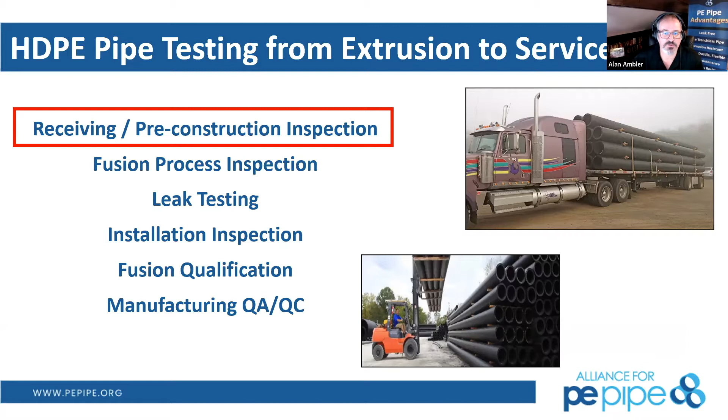If you need to pull together a 5,000 linear foot 48-inch job, that's going to be a long haul to be able to get you lots of pipe material. There's other ways to do it depending upon your project location. Sometimes they can float the pipe and then barge it directly to your project site. Lots of different ways to be able to make sure that this gets to you safely.

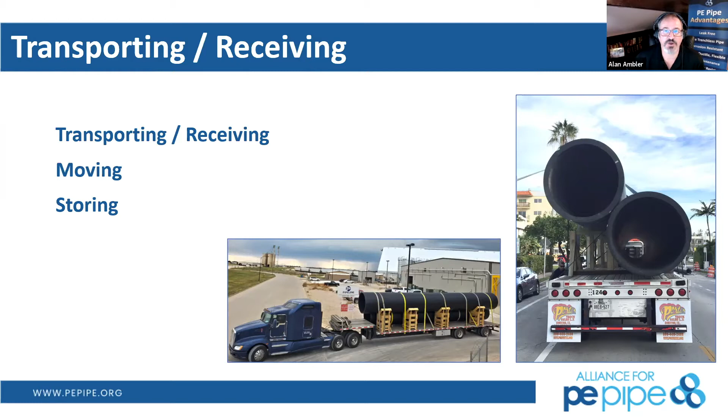We want to also make sure that it's transported or moved well while it is in the storage yard. So if you're using a forklift, we want to check that for jagged ends or burrs, and have the widest possible spread on that forklift, so you're holding the girth of that pipe material fairly well, so it's not lopping off from one side or the other.

Typically in pipe or any type of long installation process, where a completely fused system will allow you to take advantage of longer lengths, a laydown yard may be long and longitudinal as opposed to square and rectangular, where you would stack up pipe for a segmental installation.

So in instances where we have that long and longitudinal laydown area, there are productivity tools that make it so one worker can fuse up very long runs of pipe to be installed all at once. That's one of the true benefits of trenchless technology coupled with high density polyethylene, which allows us to install long runs all at once.

So these are just a couple of images showing you how to move this equipment and be safe with it. Again, we don't want to denigrate the pipe as we're moving it about the project site. I always like to point out when we're talking about transporting and receiving pipe that this is one of the key points where pipe can become a hazard. It can become a hazard to itself. It can be a hazard to personnel interacting with it and to the project.

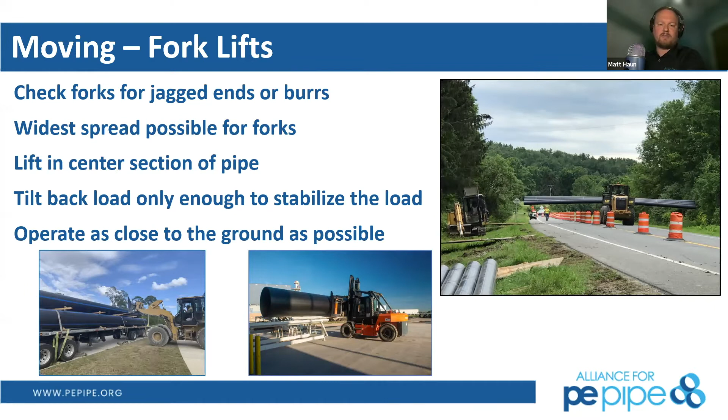And then the other bit is you can damage the project. You don't want delays because you get the wrong pipe delivered, or you've got to reround the pipe a whole bunch because it wasn't stored properly. Those are the things that I like to point out when we're talking about transporting and receiving. Great. And what are we looking for when we're inspecting for receiving and pre-construction inspection?

So what we're looking at most of the time when you receive a product is the paperwork that you receive and markings that may be on the product. And so what's the point of that? It's to make sure you received what was ordered and that it's a product that's suitable for the application. Usually when you receive a delivery, it's going to come with a certificate of quality or conformance.

So you'll see the customer name, the order number, the date of manufacture, the material type, any QA testing results if they're requested, and most importantly, the standards that that pipe was manufactured to. And so why is that important? Because when you look at the print line that would be actually on the product, you're going to want to make sure that those details line up.

Those could be the manufacturer, the size and DR of the pipe, the material that it's made of, that it's high density PE 4710 material, and any other standards that may be applicable, whether it's a sizing standard like F714, which is very common, or that it's manufactured to AWWA requirements for potable water applications.

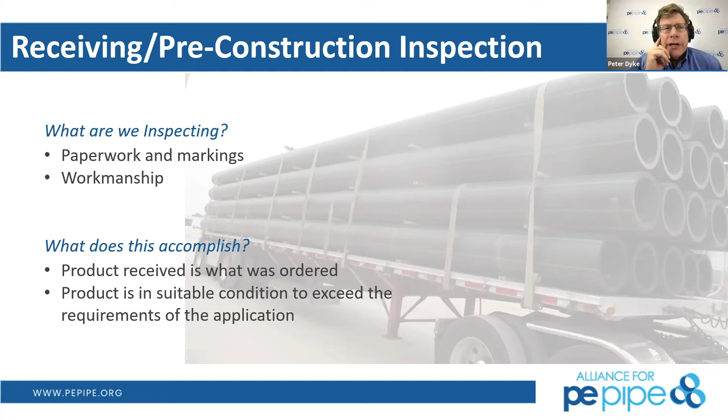So speaking, fellas, of damage during transit, I got a great question: is there a way to quantify the damage by chips or visual damage to the exterior of the pipe resulting from transportation? Now, quantifying it. We will talk in a few slides about the industry standard, which is 10% of the pipe wall would be allowable damage. It may be difficult in some cases to quantify the effect on the wall, but that has been the industry standard for going on 50 years.

Because the product is so workable in the field, if we have a long run that's already been fused up and something happens during transportation of the run along the job site, then the crew obviously is responsible for that, as opposed to transportation along trucking routes. But for that 10%, there are feeler gauges that will allow you to go into the gouge, so that'll give you an accurate record on it. But what I like to say is, when in doubt, cut it out.

The product is so durable and workable in the field that the process of fusing after you've cut a section out, depending on the pipe size, doesn't denigrate the actual product itself. The joint that we're replacing a cut section with is as strong, if not stronger, than the pipeline itself. Later on, we'll have good examples of scrapes and gouges so you can see the visual. I'm grateful you're already asking these questions, because it is covered and it is important for you to keep track of.

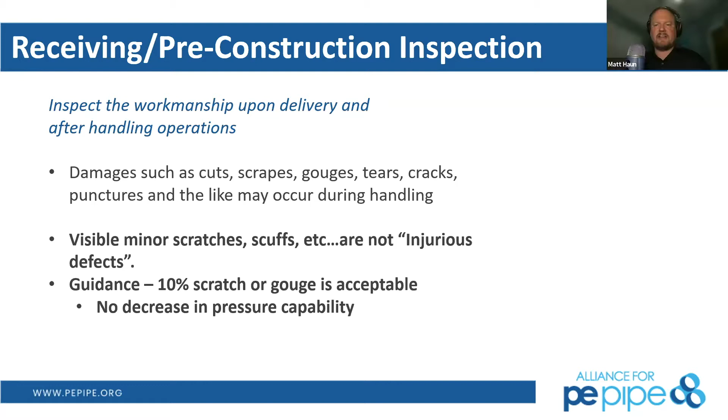One thing to keep in mind is that you need to inspect this workmanship after delivery, but also after any other handling operations. If you're taking it to a pipe yard and storing it in racks, you've inspected it. Then you're moving it to the site, to where it needs to be staged to fuse it and install it. Damage can happen during all of those periods. So it's important to check the workmanship and do these feeler gauge checks wherever you may be in question.

One other point about this inspection is that this guidance, this 10% scratch depth, is based on older PE pipe resins. Advances in resins have further improved the embedded safety factors that limit represented. So we're probably overly cautious with that 10%. It could probably be thicker than that, but this is the industry standard and we stick to it. So the pipe after this will still have a 100+ year lifespan.

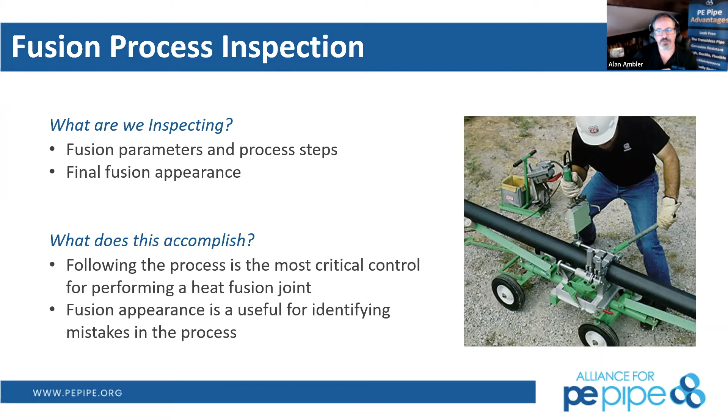Certifications are available in smaller diameter and larger diameter as well. So they're still teaching the essence of fusion, just on a larger scale, as we continue to go through that process. And here, Matt, I don't know if you want to talk to us about all the things that go into making a qualified fusion joint. It's not just the operator themselves.

The equipment has to be the proper equipment sized for the pipe that you're going to fuse, and it's going to be well maintained and qualified itself. Then on top of that, you've got a qualified procedure that you need to follow, because it's got to be a proven procedure for that product. So when we talk about fusion process inspection, we're really talking about that last element, quality control, and being able to control the fusion process is the absolute best way to guarantee a good fusion. We'll talk more about post-fusion inspections, but in the end, if you're not following the process, you're not going to have repeatable success with fusion.

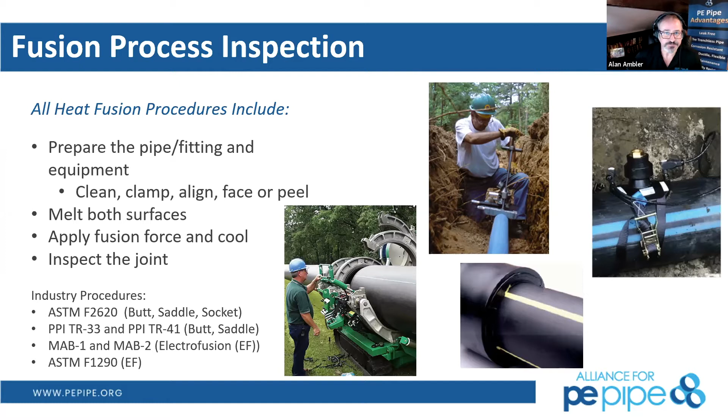So there are ASTM standards and procedures for you. You can see in some of these pictures what I mean by scaling up: as the equipment gets larger, the piece of equipment will actually do a lot of the alignment for you. When we get into smaller diameter service connections, as you see in the top right here, we've got a simple saddle around it, and we just properly prepare that location of the electrofusion saddle in order to adhere to proper fusion principles. So properly clamped pipe is what we're looking for.

Debris and contaminant free. We're looking for it to be dry, so covered from the rain or snow. If it is in the wrong temperatures for fusion, we want to make sure we make any type of temperature adjustment. If you're doing butt fusion in the middle of winter in Wyoming, you're probably going to be looking for worker comfort, as well as making sure all of the equipment is stored in the appropriate temperatures. So each job site has its own challenges that you will overcome by making sure that the pipe, the equipment, and everything is in good working condition and in a good environment.

Yes, Pete. Yeah, I would like to share with the audience that we're not going to use your name if you ask a question. That encourages more questions. Alan, I have a question and a comment. The first is, is there a list of certified personnel that is kept?

And I'll take that one. Yeah, we kind of have, and this is from an inspector in LA, we kind of have it. But Lee, one of the reasons I talked about the distributors that sell polyethylene across the United States is because we want you to use one of those distributors. They're buying into the program and they drink the Kool-Aid, and they have qualified staff that has been trained properly.

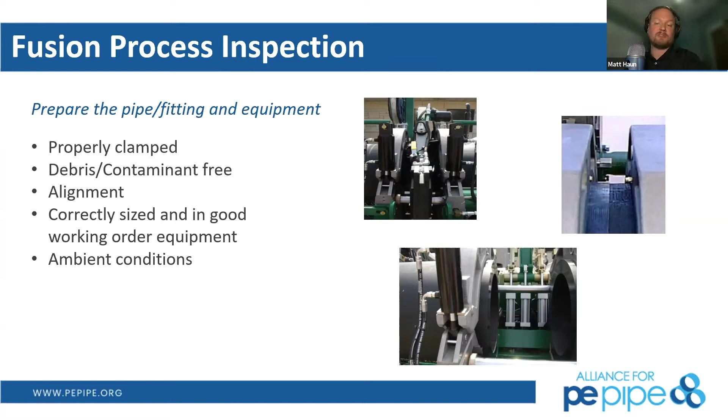And if it's a cold temperature where you've maybe put the actual fusion equipment in a heated booth or a controlled climate or protected from the rain or whatever, you are going to keep that same condition present. Matt, would you like to walk us through this slide for the actual fusion process inspection?

Yeah. So obviously, you've taken the pipe, you've clamped it in place, you've made sure it's clean, you've faced it, you've checked alignment. Now the point is we're going to go to melt the pipe. And so for butt fusion and conventional butt fusion, you're putting a heater plate in between the two pipe ends that you're going to join. You're pressing the unmelted pipe up against it, and you're applying a specific process controlled. And of course, your heater plate has reached the appropriate temperature, which you have to check with an external thermometer to guarantee that the process is at the right temperature.

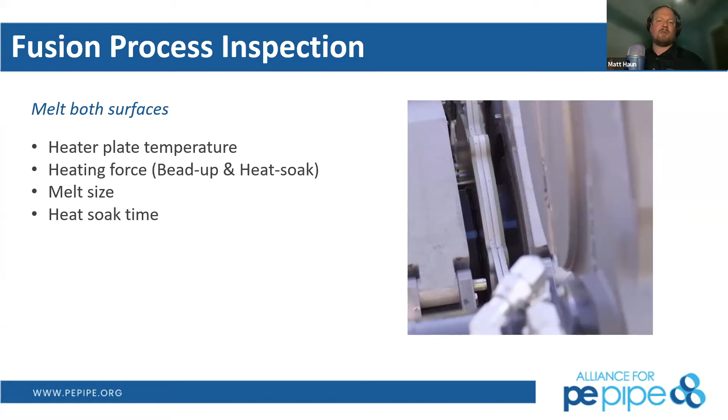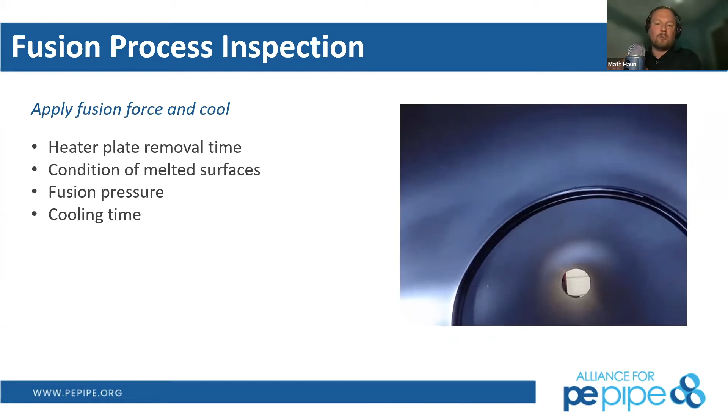You apply a bead up force and then reduce to what is known as a heat soak force. And that is the duration that you're trying to melt the pipe. That's pressure against the heating plate. Once you've achieved the appropriate melt, then you're going to pull the pipe ends off the heater plate, remove the heater plate, and then push them together. And so these key process inspection spots are things that you need to make sure are done for every single fusion. And so all of these steps can be recorded to create a record for your qualified process.

And so the next step, if everybody out there can see this bead that's created, this is on the inside of the pipe. It is exactly the same as the bead on the outside of the pipe. And then as an inspector, there's certain things that we're really looking for in the shape of the bead. Once this heat is created and applied to the pipe, we also have to properly cool it down before we do any type of rough handling with it. So it's important to allow it to have the appropriate cooling mechanism or time period in order to be a solid joint.

So here's some of the visual inspection that we're looking for from acceptable, unacceptable, and the like on the actual bead itself. What all can this be telling us, Matt? Yeah, so these are usually generated from your qualified procedure. And so the industry standard procedure is the ASTM F2620.

And so these images, what you're looking for on the bead is really that it's uniform around its circumference and there's no specific irregularity. Then also there's that V-groove that you want to make sure is above the original pipe wall dimension. And essentially you're making sure that you've applied the right pressure. So when we look at

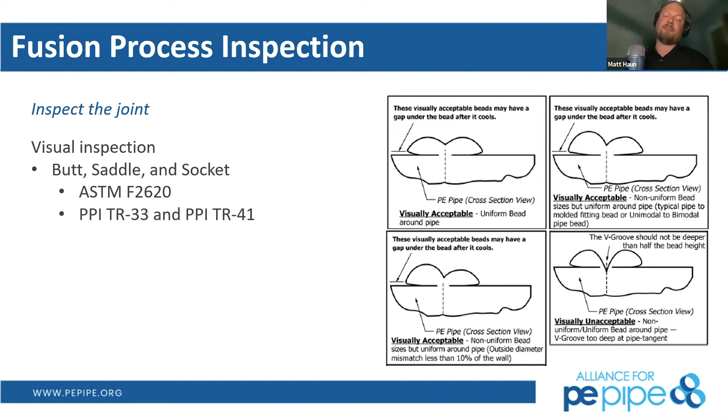post bead inspection, visual inspection, it's really only helpful in flagging those glaring mistakes that would have been made during the fusion process. So you can have a good fusion, you can have a poor fusion that looks good, but if you follow the process, you're going to have a good fusion that looks good. So that's why we also have data recording that's here. So it actually tracks all of that process.

The certified operator knows how to use this machine as well, and they attach it right to the fusion machine as we go through. It will track what the joint is, which joint by a number. It'll track the process that we outlaid for heat time and all of those other things that are necessary, and print you out a good viewpoint in that standpoint as well to track the actual joint. So yeah, and we'll talk more.

Good controllers also allow you to record the weather conditions, the ambient temperature, the wind speed, and the GPS location of your specific fusion as it's performed. That way you can follow back up after the fact.

Matt, I want to jump in real quick to address a comment from Resin Hutkins for the minimum bead requirements. So everything you guys mentioned, that is all standard procedure. And he referenced ASTM F2620. And at the end of the day, we always need to make sure that the fusion is actually following up and actually getting to that minimum bead requirement.

So although the heat time might tell you it's 1 minute and 11 seconds, it's also telling you need 3/16 of an inch on each side, so we're going to have to wait until we get that 3/16 of an inch. So if you're working in the Pacific Northwest in the winter, you might have to wait 1 minute 45 or 1 minute 50. So that's the standard we always want to make sure we're hitting.

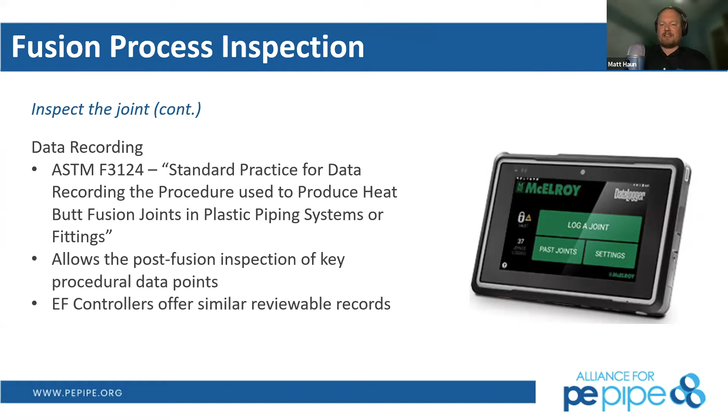So there are new technologies now that we are starting to incorporate within the high density polyethylene industry. If you heard me speak very much about high density polyethylene from a civil engineer outside of the industry viewpoint, I've seen a huge amount of technological development, ease of productivity tools and other things throughout the HDPE industry that makes life easier when we're installing this. And this is microwave HDPE fusion inspection.

It's a new technology that essentially has a sender and a receiver on opposite sides of the pipe, and then we actually look at that joint itself. You do have to debead the exterior of the pipe in order to be able to make sure that that tool can traverse circumferentially around the pipe.

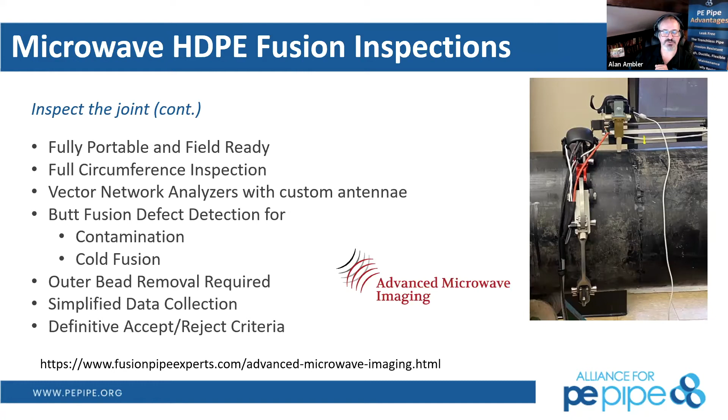And then it does look for fusion and how that molecule is actually blending together, of what we're really attempting to do through the data logger, and making sure that the molecules run across each other in the crystalline and the amorphous regions themselves. So here are just some. Again, this is pretty new, on the cutting edge of technology for that fusion inspection.

We were looking at things that could be good fusion, hydraulic fluid contaminated fusion. So if we get to a scenario in which some type of a contaminant was there, it's going to impact the fusion process and parameters and really send up a red flag for us that it wasn't done correctly.

Or if potentially water had gotten onto the actual face of the pipeline during fusion, then that water could release steam as it goes through and gets heated, and put a pocket of absence of material in there that we're looking at. In cold fusion, we're over pressurizing the pipe and forcing it together to not allow the proper time to be able to fuse that pipe material.

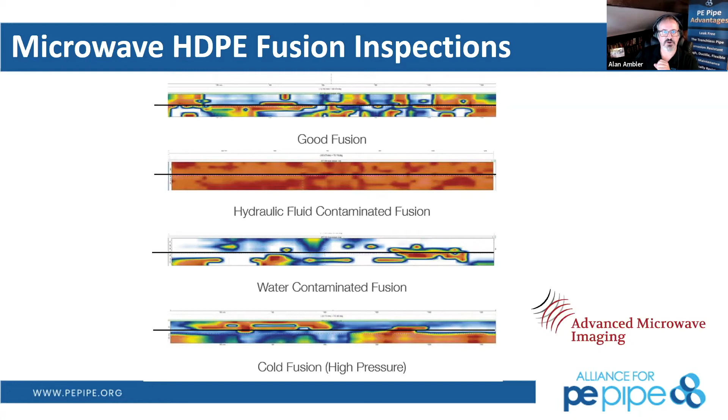So this is just a new tool that's coming through, and in the next several years you'll be hearing us talk more about it as it gains more popularity.

So we'll go right straight to leak testing now. What are we inspecting? We're looking for faults in the pipeline in general, regardless of pipe material, as we go to put in its installation or its connections. Of course, high density polyethylene is a leak-free material. So if fused from one end to the other, we're not going to have any leaks.

But oftentimes when you are putting in new systems, we have to connect to valves or other pipe materials, and a completely monolithic system for a municipal water wastewater system would be almost impossible to achieve in some places where we have a lot of existing pipe to go through. So one of the key things to understand and differentiate between legacy pipe and high density polyethylene is that there are allowable leakage rates within those legacy pipe systems. And part of the way that these things are constructed is what leads to that.

So what you're looking at here happens to be an open cut installation project of high density polyethylene. And as the crew moves forward and puts this pipe into place, the local MOT conditions or road resurfacing conditions may very well kick in where you'd have to bury this pipeline before we could turn it back on, in which case that's where the allowable leakage rate comes into play for legacy pipe materials. It would be extremely costly for the contractor to dig up the entire run for a little bit of leaking to be able to properly access the pipe that was installed. And that's one of the reasons why we have an allowable leakage rate as such.

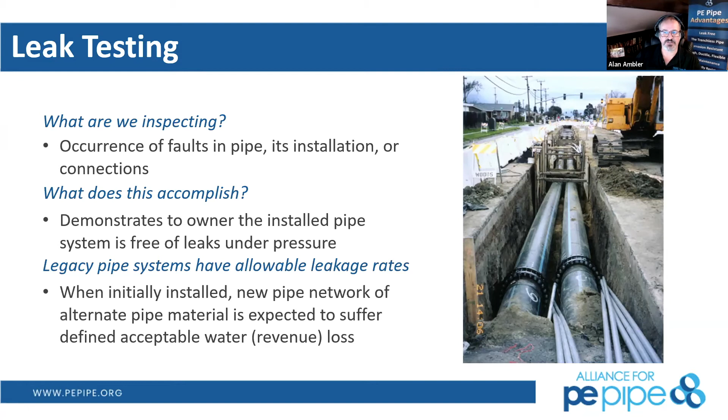How is this different from a regulatory perspective? Those of us that have talked about it until we were blue in the face know that the commodity value is what really differentiates the municipal water and wastewater sector from a municipal gas sector or some other type of commodity that we're talking about. So when gas mains leak, things blow up and kill people. So the consequence of failure is severe in that situation, in which they want to make sure that we know the condition of the pipe, we know when it's going to fail, and we proactively replace it. That is pushed from a regulatory perspective.

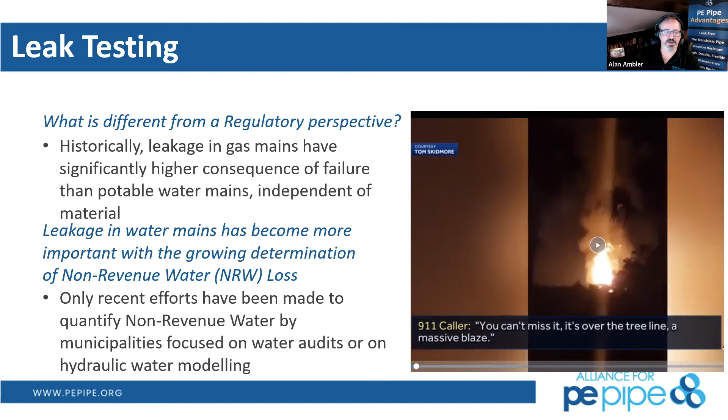So here's the ASTM... Go ahead, Dan. Yes, sir. Sorry, Alan. I think I might have jumped the gun on you a little bit early, as I see leak testing just got pulled up. And I'm not sure if you or Matt want to answer this. I know you've been on a ton of job sites in person, but they are wondering if the flex in HDPE is something that you can observe during leak testing. I'm guessing they're getting at the swelling of the pipe. I'm not too sure if you actually can see it or not.

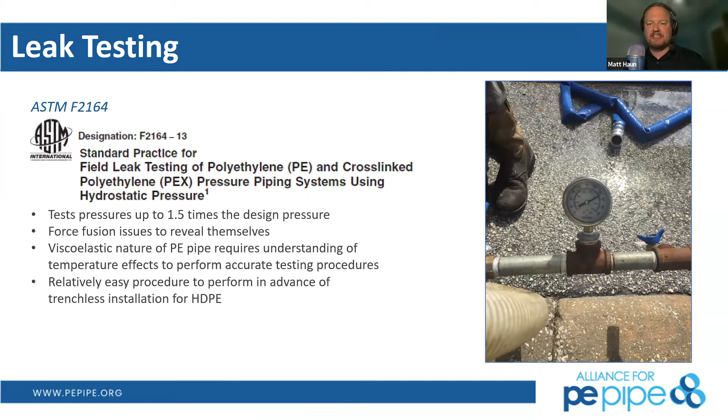Yeah, and Alan, that's due to the Poisson effect. Basically, as you expand the pipe during pressurization, the pipe length is going to want to contract. And so you're going to notice that you may have a pullout force that you need to account for when you transition to other piping materials. When you're going from polyethylene to polyethylene in a heat fused application, those joints are monolithic and self-restraining. So they're not going to pull out from each other.

So the overall test parameters themselves, we seal off that end of the pipe, still allow us to be able to access the inside of the pipe through an opening that you're seeing here on this fitted end. As we go through, we're going to get to that max internal pressure that we're looking for, let it sit to be able to see if we needed to add any makeup water that way, and it takes care of the expansion of the pipe material as we are charging that interior of the pipe. You reduce that pressure by 10 psi and hold for 1 hour, and then we look for any additional makeup water that goes through there.

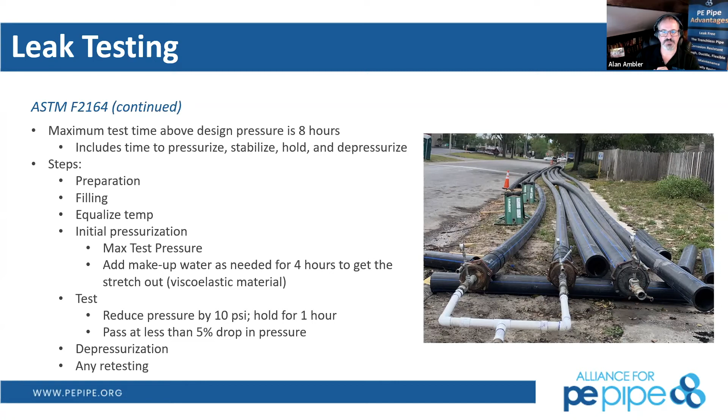For the long runs above ground, this is a pretty robust process, as we're looking for any leaks whatsoever within the pipe, and they would certainly show themselves through this process. Again, it is very different from bell and spigot pipe when we're limited to certain sections to be installed because of MOT constraints and other things. Again, I said trenchless installations are different than traditional open cut.

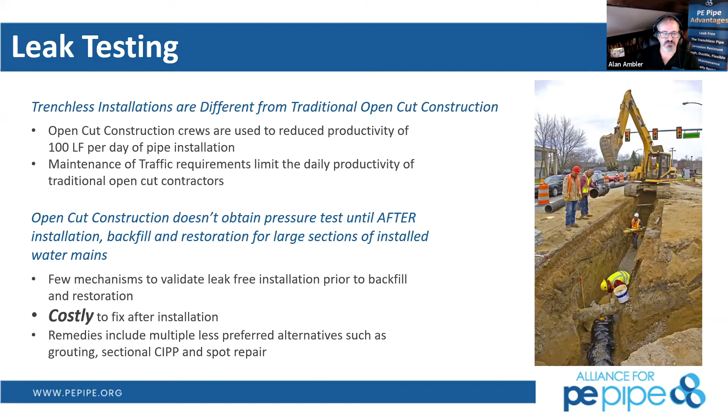Here's a prime example of a segmental pipe being put in. By the time that they bury this pipe up again and realize that they can't maintain a pressure test on it, then it's going to be pretty costly to come back in and expose that pipe and do that fix. So the benefit of having high density polyethylene above ground to be pulled into place that we already know is pressure tested, and not pressure testing it after backfill and compaction, is pretty easy to observe.

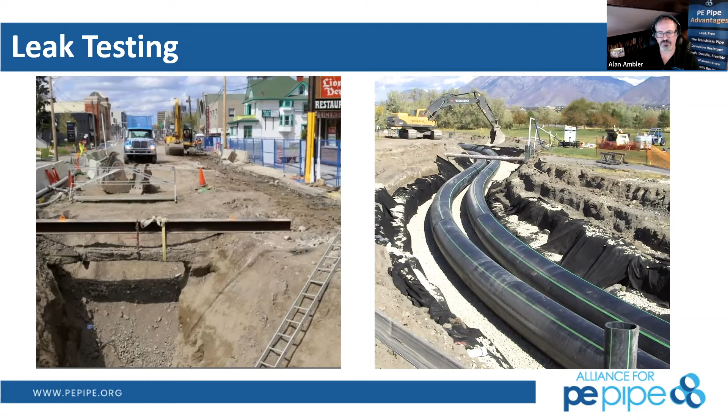So here's again some differences in installing the pipeline as we move forward. Here we can see that these pipes may or may not be leaking as we install them, and we would have done the pressure test in advance of pulling these long runs into place as well. There's a process called pre-chlorination. So at the same time that you're doing that pressure testing, we're going to disinfect the interior of that pipeline. So they'll put bleach through that pipeline to be able to make sure that any contaminant that may have gotten into it is knocked out and disinfected.

You flush out that disinfected water and replace it with potable water from the water system, and then take 2 days of subsequent bacteriological samples that will prove that the interior of that pipeline is safe and disinfected. And then by the day of the pull for a horizontal directional drill or pipe bursting, you'll seal off the end, connect it to a swivel or other sealed end, and then be able to pull that into place. It's a rather robust system in which we'll be able to turn that pipe on almost immediately in the states that have approved the process.

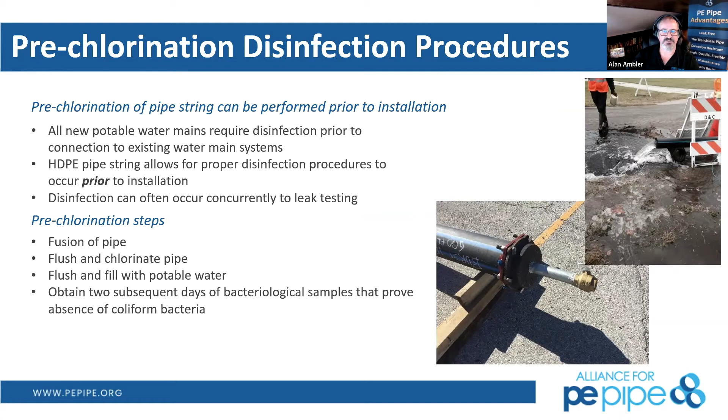In traditional open cut construction, what we're really looking for is good backfill conditions for unique burial conditions, such as excessive point loading or very deep installations, or very poor native soil conditions. So typically that 2 to 3 feet to a 25-foot depth range can be installed with no issues on high density polyethylene pipe in general. From DR11 to DR21, we're looking at specific scenarios if you want to look at pipe soil interface type.

Yes, Dan. Okay, yeah, you went on a little bit longer. I was going to ask you when point loading is a concern, because I know a few engineers were conservative and addressed that with you, and I know it's come up a few times.

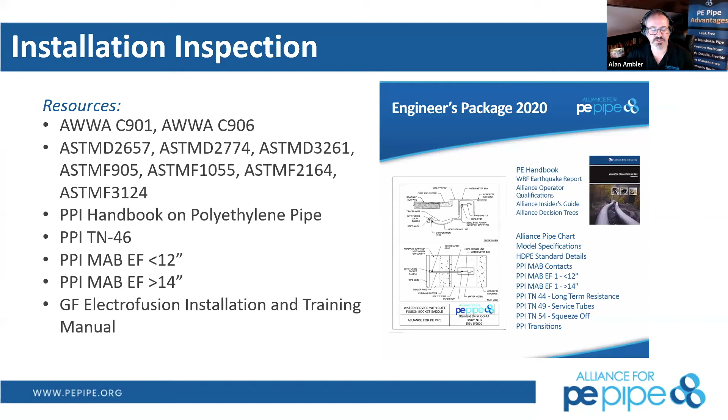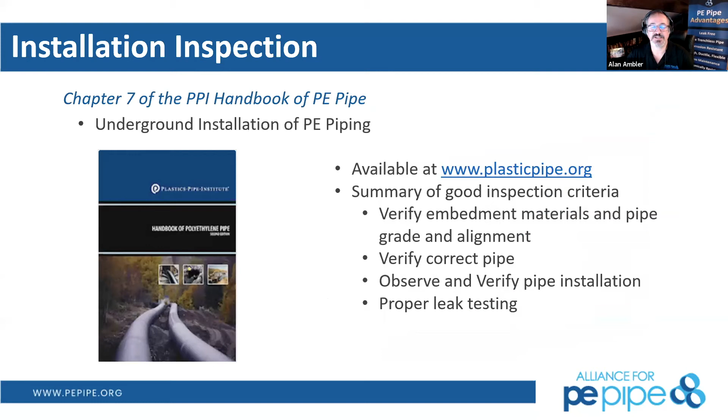Awesome. Thank you. These are resources available to you that are listed. We've mentioned C901, C906 before, M55; AWWA just reissued a new version of their handbook that is easy for you to use. Most of those are included in the engineers package. We're not allowed to include ASTM or AWWA standards themselves, but we do list those out so that way you can get them if you'd like to. Chapter 7 of the polyethylene handbook on PE pipe talks about all things underground installation, and it's a very good resource for you that's here in the engineers package.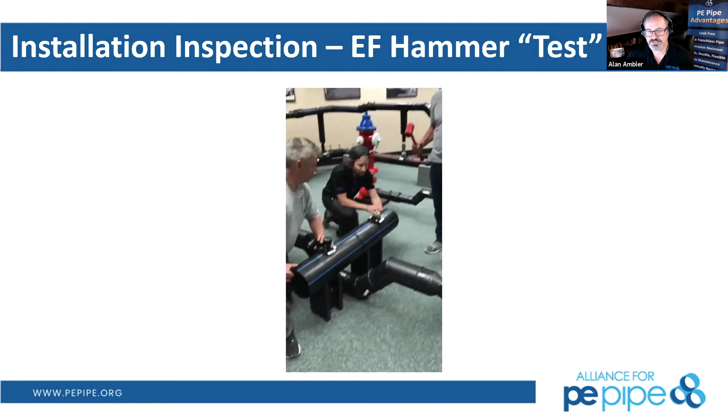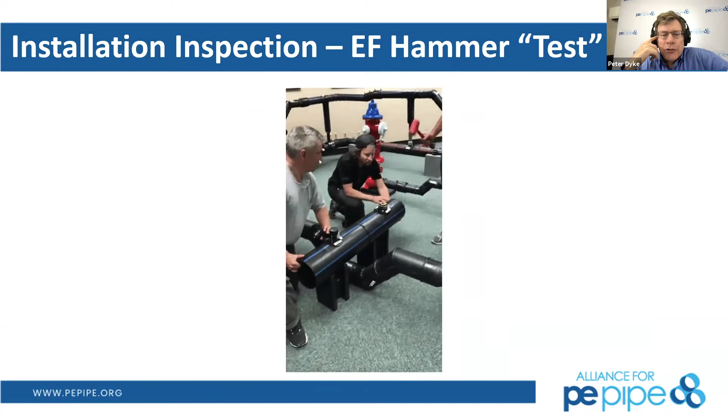Here we have an installation EF hammer test. Pete, do you want to come on and tell us about this hammer test that you and Richard and Drew were able to conduct here? Well, this is the most scientific of all the tests that we'll have in the show today, Alan. To be sure, this is our good friend Steve McDonald. He had an owner who didn't really trust electrofusion, but you know what, Alan? Electrofusion is just as good as butt fusion. In both cases, you got to follow the rules, and that's what we did when we put this pipe display together. So good work, Steve McDonald.

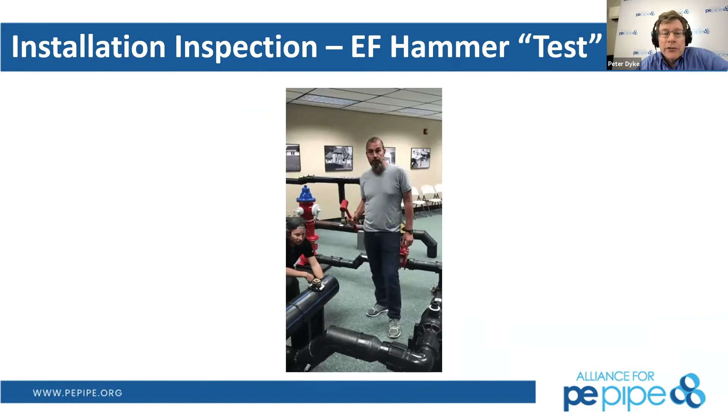Thank you, Steve. There's other reassurance testing that we're going to get into too. The bend back test, guided side bend test, and other things that you can accomplish on site. These aren't necessary for every fitting or every installation. Obviously, these are destructive tests that you would perform. So if you're curious about a new fitting from a new fitting manufacturer, this would be a good opportunity to validate that the fitting does pass the testing that you're looking for.

Maybe you'd want to do 1 or 2 of these tests at every start of the project to make sure that the fusion operators are following the process and the steps correctly. If you're unfamiliar with a contractor, go through some of these other robust tests.

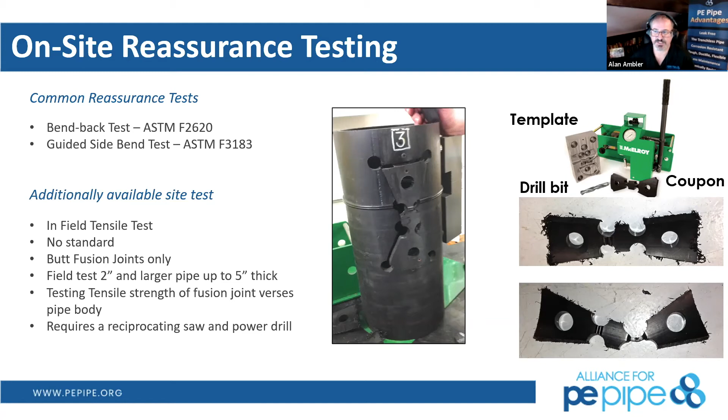From that, I'm going to talk about the F1055 standard, which is a joint crush test coupling preparation. So we will take and cut an actual coupler longitudinally across that coupler. This is something that you can test in the back of your pickup truck if you got a vise mounted on the back of it. So we'll have the electrofusion operator make sure that they perform the electrofusion properly in the field. And then this will actually go through the process of forcibly smashing down that pipeline to see if the coupling crush has passed that electrofusion process or failed that electrofusion process.

The Alliance for PE Pipe has a very good video of this that will be coming out hopefully in Q4 in some of our social media posts that you might see. But as you can see here, the coupler on the left did pass the electrofusion process, and the one on the right was not prepared properly. That surface preparation is key for electrofusion. This is something that a construction inspector out in the field can do in a vise in the back of a truck.

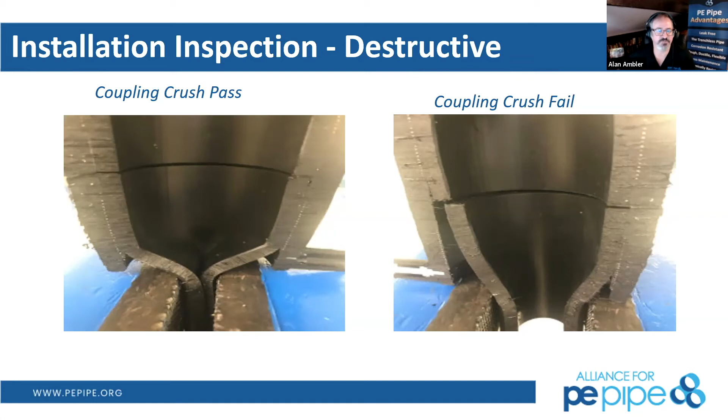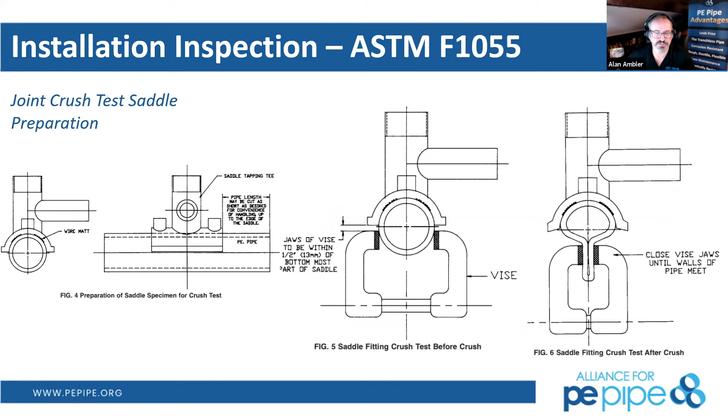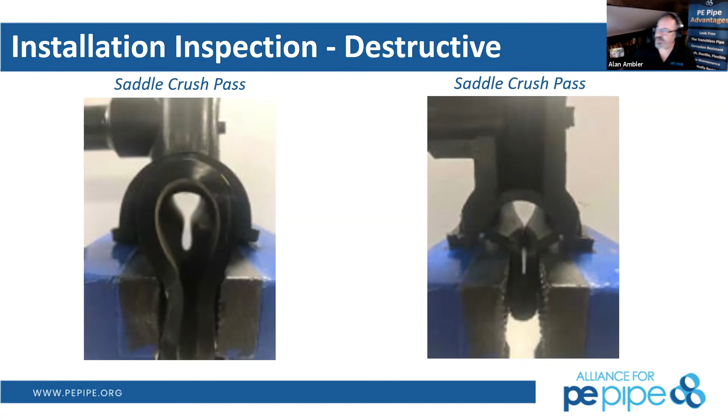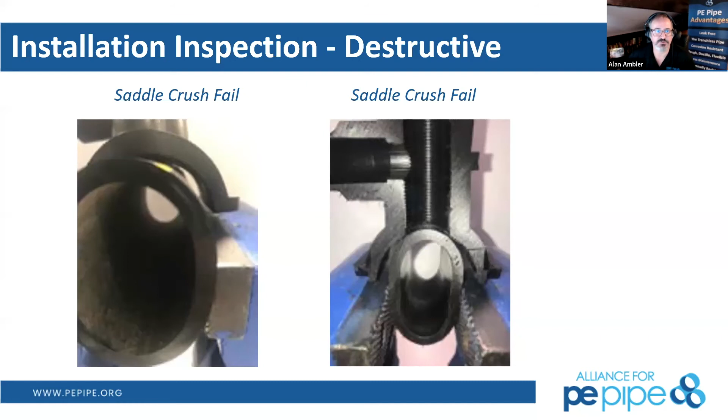You can see here that this was improperly prepared, and the bond did not happen correctly between the saddle and the mainline pipe. And as we crush that pipe in a vise, that failure will show up right away. Again, with butt fusion and electrofusion, if the process is followed appropriately, that joint should be stronger than the pipe itself and should not be pulling out of this saddle as we show here. So this is an easy test to do on a relatively inexpensive fitting with a new contractor to make them show you that they can do it appropriately.

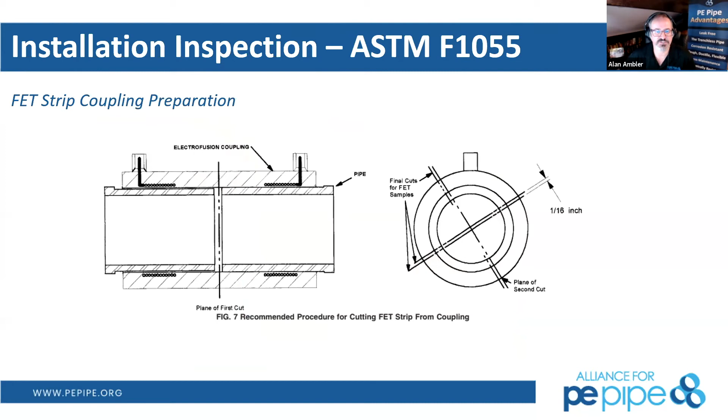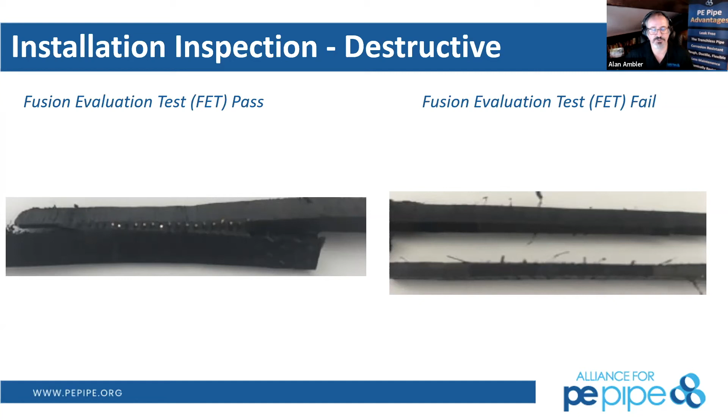So here's a FET strip coupling preparation. This one is slightly more challenging to get to as far as looking at what we are trying to analyze. We're going to bend that strip about the fusion line and then get to our end results. Here we show a proper pass of this test and then a FET fail of this test in this scenario. So there's multiple different ways, but these are all destructive. And again, some of these fittings may be appropriate to test in a destructive manner if you're trying to get to know a new fittings manufacturer or you've got a new contractor on the site.

And Matt, do you want to take over and talk a little bit about the data logger here? Sure, and what it's showing us. So we talked earlier about all the different steps that you could record in real time. What that allows you to do is have proof that you've followed it successfully, and you're basically trying to guarantee it won't leak. It's definitely important for more sensitive or challenging installations, and I believe the next slide will go through it a little bit, where you won't be able to recover and redo the work that you've done. So you're going to want that extra reassurance on the front end.

Recording all of the fusion process steps will allow you to prove that without having to go back to redo your work. You get to see the bead-up pressure, that first initial spike. You've got heat force and heat soak time, that long period under the green line. This is a pressure versus time graph. Then you've got a key amount of time to remove the heater plate and apply your fusion pressure, and that's the red zone, indicating you're applying the appropriate fusion pressure. Then you're holding it for your cooling time, the blue area, for the duration needed. That allows an owner to either hire somebody to analyze all of their fusions or do spot checks. They can pull up every single fusion on the entire job and review the data.

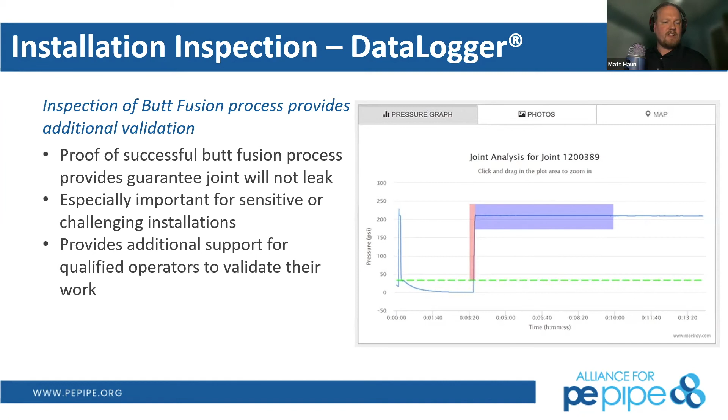So when Matt talked about sensitive locations, we mean that high value asset where consequence of failure is severe or failure will go unnoticed for a significant amount of time. On the left here is a 54-inch, 4,100-foot low pressure force main in Miami Beach where we want every single one of those joints to be absolutely perfect. And your fusion tech is going to want that too and have the proof on it, because after this asset is installed, if it fails, it could take some time to discover where that failure is and then to replace it.

The same thing with the picture on the right, which is a subaqueous or bottom of the river type of installation, where if this pipeline failed, we could be leaking some of the useful water that we're trying to collect, as that is a source water pipeline.

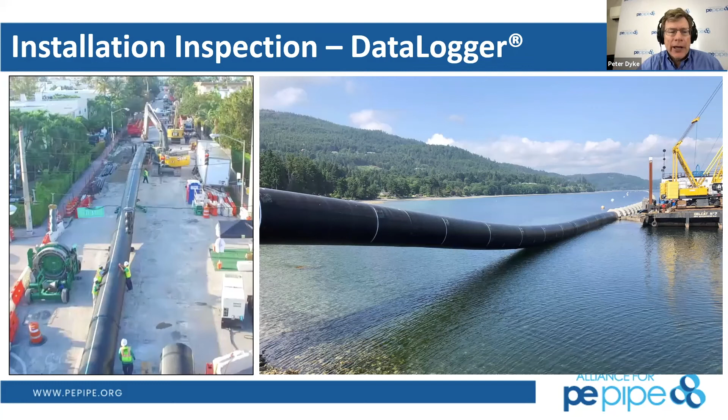Thanks, Pete. So some of the key observations that we're looking at are disinfection procedures, pipe scraping or gouging, as we've talked about significantly earlier, proper alignment of that inspection or installation equipment, handling of the pipe beforehand. If it's offsite at a laydown yard and we want to pull it into place, either for a horizontal directional drill or pipe bursting application, that construction observer should walk the full length of that pipeline to look for gouges or scrapes that are in excess of that 10% limit that we're talking about.

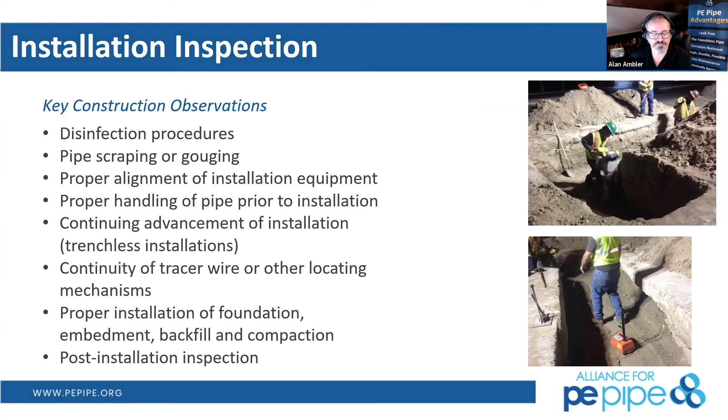Want to make sure that that tracer wire is continuous. So for a sensitive pull through high friction areas, we may very well want to do a beefed up tracer wire or 3 to make sure that we have that asset to be locatable in the future, and all proper compaction backfill are necessary. We talked about when in doubt, cut it out.

This picture that you see here occurred at 3:30 a.m. on a pipe bursting project that was on a DOT road where we had very minimal time for road closures. That was from 7 p.m. to 5 a.m. And I had noticed a very large gouge in the pipe, the second pipe run that they were pulling into place on the second night of the actual pipe bursting process.

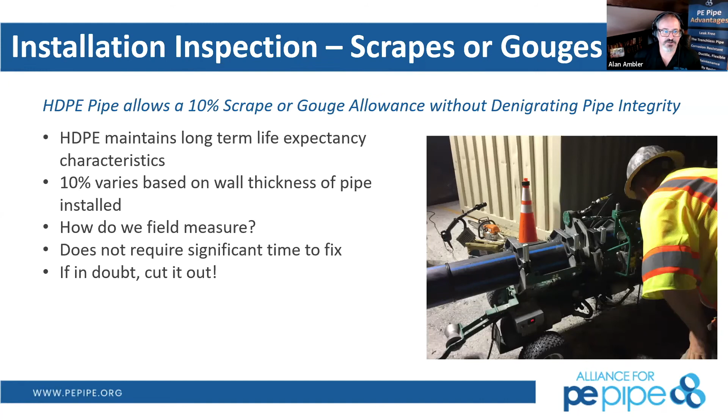And all it took for the superintendent on the job site, after I had determined we were cutting that section out, was to cut out a 5-foot section that contained the gouge, and then to be able to butt fuse that pipe through. And they lost about 25 minutes. So when in doubt, cut it out is exactly what I go by. And here's some process of how that happened.

Oftentimes we use truck tires or other things that are soft to directionalize a pipe moving process from the laydown yard to the installation location. Here you see a piece of plywood that's up against a dumpster. The second night when they had the gouge, someone forgot to put the plywood in, and so the edge of the dumpster then gouged the pipe.

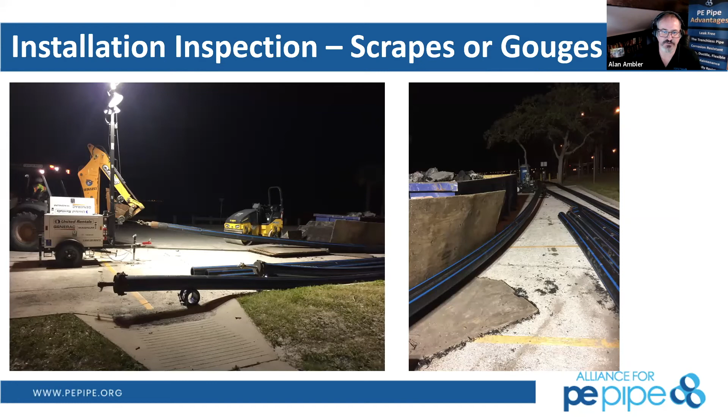These are normal scrapes that are okay. This is on the right. You see just a bead that's scraped through, and they pull that along the ground for pretty typical processes. And this does not exceed the 10%. If you don't want that, there are rollers and other things that they can pull along.

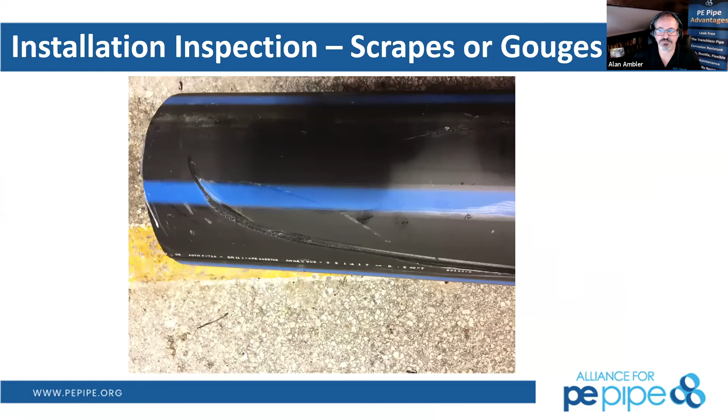This is the gouge section in particular that I had wanted to have cut out. So I did have doubts about this and did believe that it exceeded the 8-inch DR11 wall thickness beyond that 10%. And we simply cut it out as we go through. So we want to look at locating mechanisms. Of course, high-density polyethylene is a thermoplastic material that is not electrically conductive, not like a metallic pipe. So we want to often put that tracer wire, float balls on that.

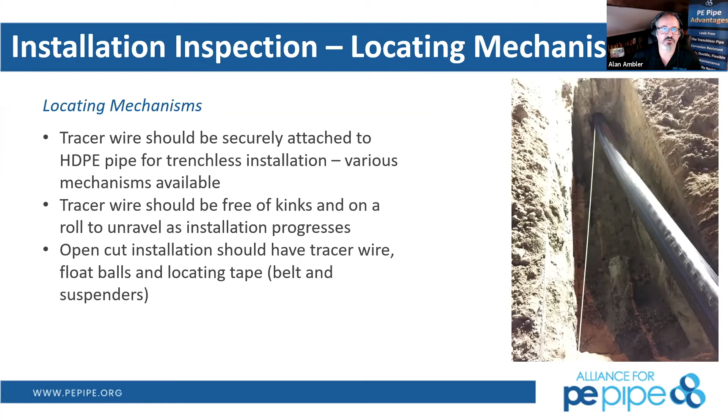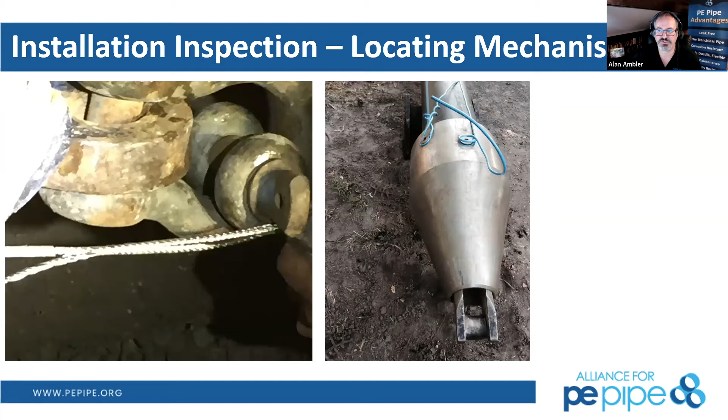Some things that we're looking at post installation: CCTV to validate line and grade for gravity sewer application or storm sewer application. Smoke testing, we can smoke test polyethylene pipe for gravity sewers themselves, or low pressure gravity sewer testing through that as well. And then preparation of those as-built documents in whatever manner that you want to, as an engineer, collect that information. So there's lots of different mechanisms to be able to provide those as-builts.

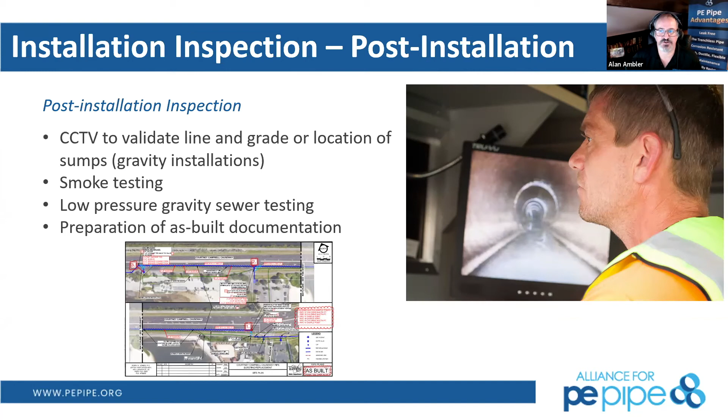If you have GIS records that need to be beefed up, it is quite possible to use a Trimble or other GPS locating mechanism to actually get on top of any of the valves or other important appurtenances that you want to capture their location themselves. So we're going to talk about fusion qualification.

So we talked about the process inspection before and did talk a fair amount about actual qualification through that process discussion, and then manufacturing QA/QC. Pete, you got something for us?

Yeah, something quick, Alan. I don't want to push you back any further, but I got a question about once tracer wire breaks, how do I reconnect it? And does it really break very often? That's a great question. Oftentimes it'll depend on the friction through the soils, and yes, it can break. That's why in HDD, where we have a deep crossing, we're going to put 2 or 3 of the tracer wires through there, and the same thing with pipe bursting when there's high friction forces.

The way to reconnect it then, depending upon where that tracer wire actually broke, you would perform an excavation, get down and splice it together with a new tracer wire and connect it to the valve, and finally all the way up to a meter as we go through, so there's continuity through that line itself.

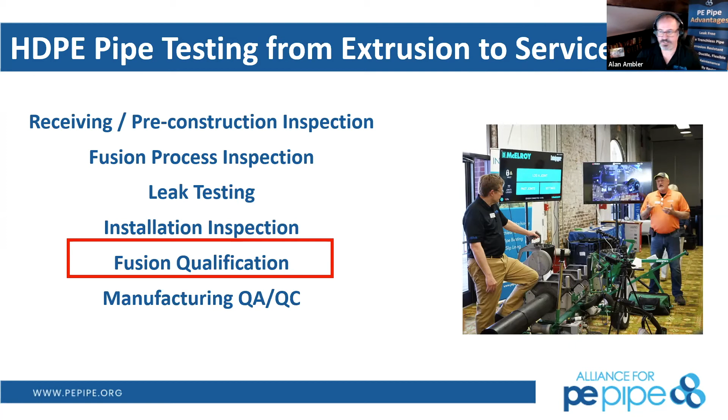It is not uncommon for locators to be able to try to get signal in different places. In one of the projects that I've been to, the tracer wire popped in the last 5 feet and yet they were still able to trace that line all the way up to 5 feet from where they started the next set of tracer wire on the valve. So they do have different mechanisms in order to be able to try to find this pipeline afterwards if that tracer wire does break on you. So great question. Okay, fusion qualification, Matt, you want to take some of this?

Certainly. So fusion qualification is represented in both our material and product qualifications, but it's also utilized in pre-construction on-site considerations. So, what are we inspecting? Well, that the procedure is qualified and that the operator is trained and proficient with the equipment. So what is that going to accomplish? It's going to verify that the operator has the appropriate amount of training with the appropriate equipment to do the task.

So next slide. So we look back at the same Venn diagram that we had before, regarding the things that must overlap. And obviously qualification is a matter of 3 of those 4 elements. You've got a qualified procedure, qualified operator, and qualified equipment. Next slide. So most of your manufacturers are going to manufacture their products to industry recognized heat fusion procedures. So the most common one is ASTM F2620. It's a generic fusion procedure that came from PPI's TR33 and 41 testing.

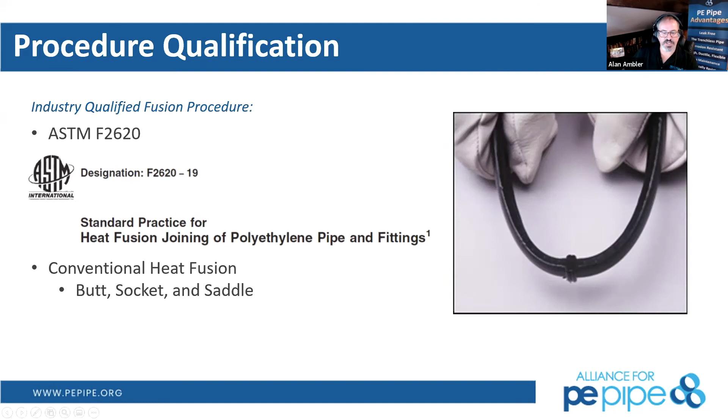And so if you're using a qualified procedure, in order to qualify that procedure, you have to do a barrage of physical tests. So stealing again from the gas distribution industry, the Code of Federal Regulations has a very specific list of required physical testing that you have to perform as a manufacturer of the product or the utility utilizing those products to make sure that the polyethylene that you're installing and the fusion procedure that you're using are qualified. Next slide.

So we're getting into the parts of the presentation now that really build before we even bring the material out into the field. So there are lots of things that govern safe working with this, safe manufacturing, robust manufacturing to where we say it's going to be a 100-year lifespan. And then these are all the steps and processes to make sure that when you do put that pipe into the ground, these are the best ways to achieve that maximum lifespan that we're preaching and looking for.

And a number of the tests that you can do for actual operator qualification can be done on site to reassure. We talked about on-site reassurance testing before. Many of these same techniques can be used and are used on job sites to make sure that, hey, this crew that may have gotten their qualification a year ago is still up to snuff and they're still able to perform it, and more specifically with the specific equipment at the specific job site.

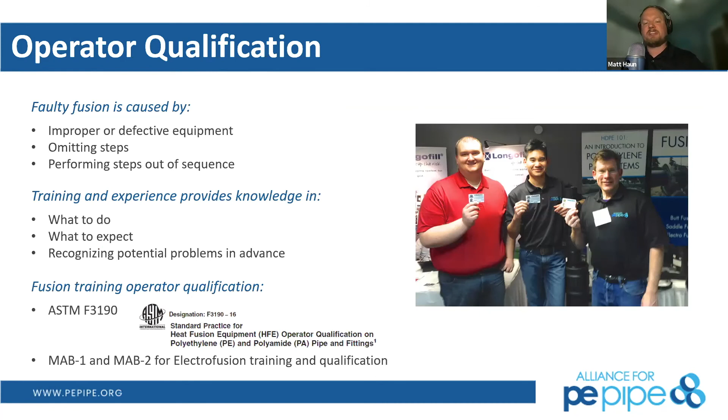So when you know that you've got a qualified procedure, the next logical step is to look into what causes a faulty fusion. And so there's an ASTM standard that dictates the training that an operator has to have in order to be qualified to perform fusions. So F3190 will require physical tests of samples that they make in order to receive your qualification card. So the most common method is actually found in F2620. It's the bend back test. Basically for 1 inch and thinner pipe walls, you take a longitudinal test strap from a pipe fusion and then bend it back.

So the inside of the pipe is on the outside of the bend and the outside of the pipe is on the interior of the bend. And so basically you're looking for that bond continuity and to justify the strength. So you can't see any cracking or crazing or any sign of failure. And of course, these ends are bent all the way back to touch themselves. So it's a very rigorous test on that actual fusion.

So Matt, with a wall thickness, let's say it's a 24-inch, 1 inch wall thickness here, you're probably not going to bend that back by hand, right? The Incredible Hulk probably could if we were watching the Avengers, but not gonna be able to bend that one back by hand. That's pretty stout, robust. Right. Yeah. 1 inch is really the limit of this test. But yeah, you can put it in a vise and then just bend it over on the vise.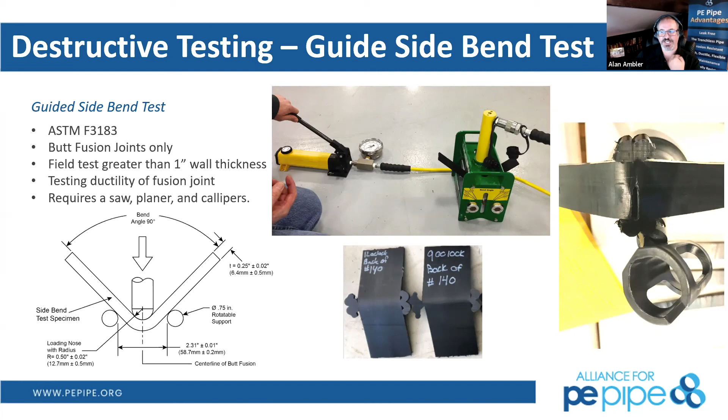Just because the Alliance for PE Pipe has a big Penske truck and hauls all this stuff around doesn't mean that everybody out there can't have their own equipment to make that happen too. Definitely. So we'll talk more about manufacturing QA QC through here. And I'm going to defer to Matt because this is much more his realm than mine, but I still will frame the important components of it as it applies to field inspection. We only have about 4 minutes left of the regular time, Matt. So high step it through these.

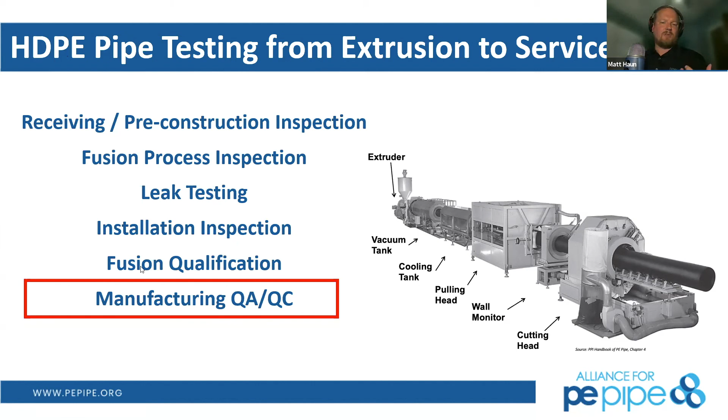Yeah. So making solid wall DR pipe is a multi-step process. You got raw pellets that extrude through a die into a vacuum tank to set an OD, and then it comes off the extrusion line and is cut to lengths. So what are we trying to test? Go to the next slide. We're testing on site raw material properties. We're testing the dimensions, the workmanship of the product as it comes off the extrusion line, and we're performing physical pipe property tests. We have to set out that the resin we use, the product that comes off the production line, and the pipe itself can withstand the environment that you're about to put it in for 50 to 100 plus years. So next slide.

So before we get into those kind of tests that we do, we want to look at, where do you get your guidance from? Well, the Municipal Advisory Board of PPI, they're a team of experts that offers advice on the industry. And so they've drafted a specification for potable water applications of HDPE. Go to the next slide. Basically, this specification is going to outline all of the material properties that we require people to produce our pipe to meet. And so that's PE 4710, it's a 445574C cell classification.

But probably more importantly is that the manufacturer has to have a listing in PPI's TR-4 that says they've done their data to make sure that their products can meet the pressure rating requirements of the product. As well as the next part would be AWWA C906, a required standard to follow for any potable water application. And so if I wanted to manufacture high density polyethylene, Matt, I just don't go in the backyard and start to push it through a homemade job right over here.

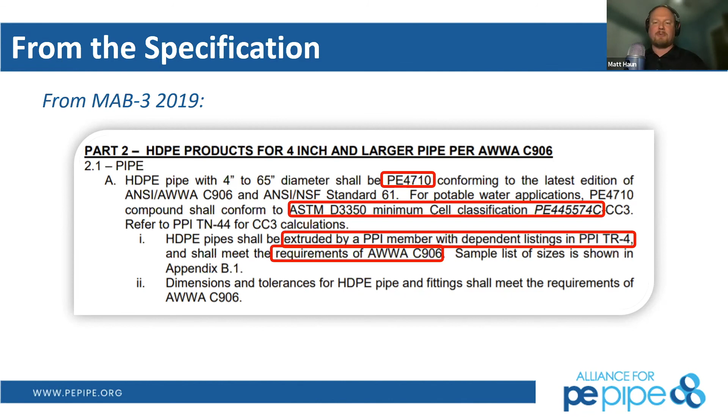That listing that you're going to see in TR-4, it's going to take a minimum of 10,000 hours of sustained pressure testing of numerous samples. I think it's over 100 samples, something like that, on pressure test for 10,000 hours. That's almost 2 years, I think it is. Your facilities get randomly inspected too, don't they, Matt? Absolutely. So they're audited, and as a PPI member, you have to continually renew testing of your products.

And so most of that is controlled by the resin manufacturers that we get our supply from, but it's our duty to make sure that listing continues to be met. And so the next bit is we need to physically test the product. So C906 requires daily tests of bend back or elongation at break. And basically with these two tests, you're really trying to root out any flaws in the resin or extrudate quality.

And so this bend back is basically taking an arc of pipe and bending it so the inside of the pipe is to the outside. And if you have no stress marks, no cracking, crazing, or fracture on the interior of the pipe, you're not going to have flaws that have manifested themselves in this test.

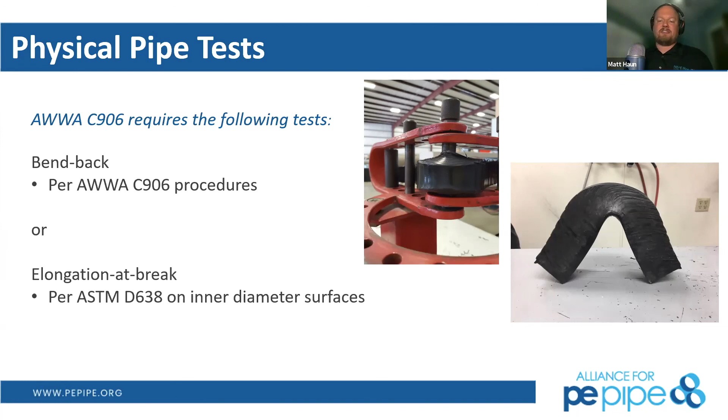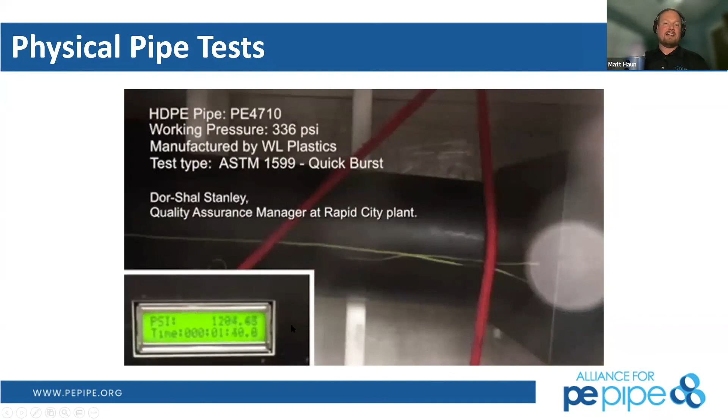So the purpose of this is that you're checking the reserve strength of polyethylene. You're making sure that it's a ductile failure. And that's highly important because polyethylene in its typical operating conditions should be in the ductile condition. If you conducted the same test against a PVC or a ductile iron product, you would possibly see a brittle failure, which could result in a long fractured series of pipe that's very dangerous in the field.

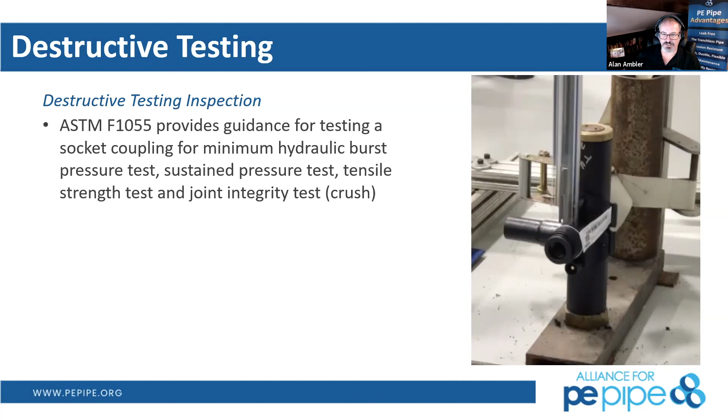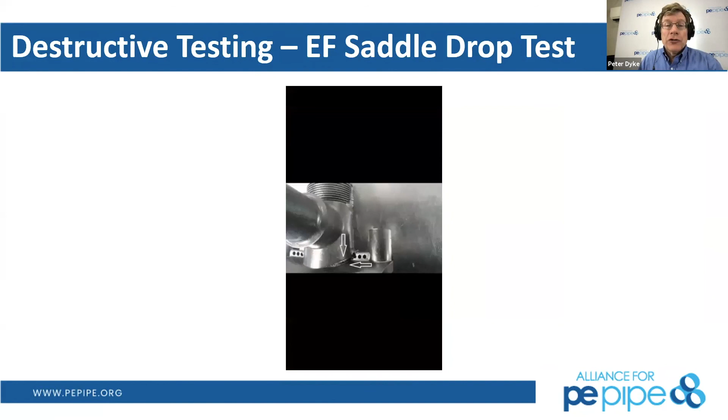Well, actually, it did occur at the pipe wall, not at the fusion. So it actually tore the saddle away from the pipe wall, which is what you're looking for to say that your fusion was good. It must break the pipe itself, not the fitting.

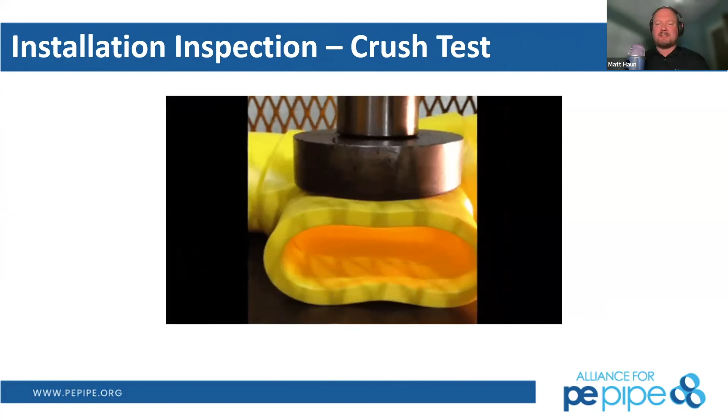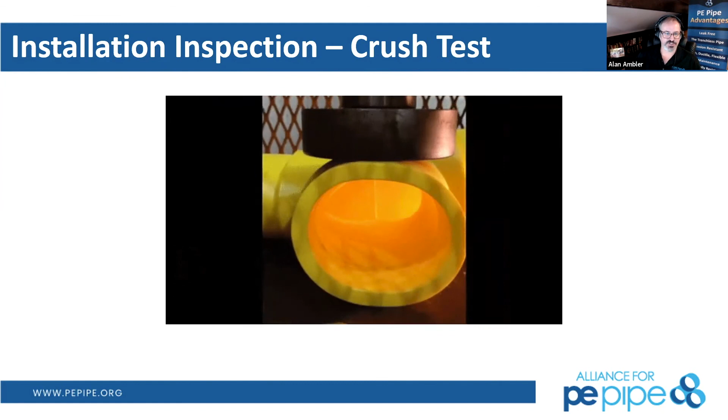And then the next one after this is a crush test where we're looking at deformation of the pipeline. And you're trying to root out knit lines that may happen in an injection molded fitting like this. And as you can see, this thing almost returns to its normal shape. Over time it probably would return to its normal shape, but it just illustrates the robustness of polyethylene. It's not changing coloration, so it's not pushing past its deformation limits there. And Matt is correct, it easily could come back to its natural shape.